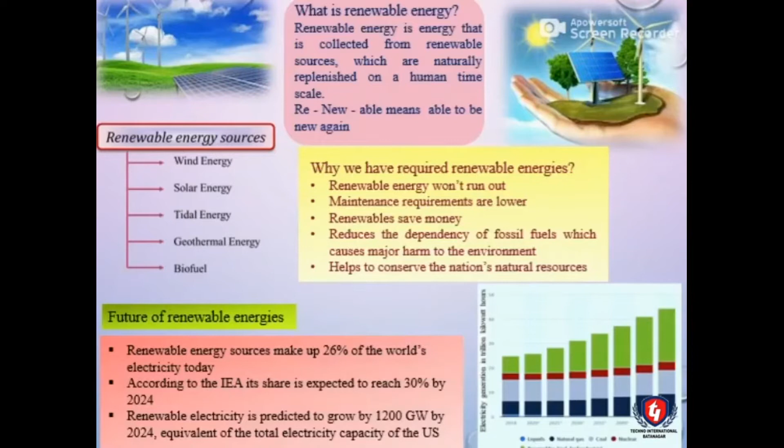Now, due to rapid enhancement of global energy consumption and decrement of traditional energy resources, the research activities on clean and renewable energy sources are continuously increasing. On the other hand, as these new energy forms are regionally limited, it is very much needed to develop advanced and efficient energy storage systems such as supercapacitors, whose efficiency is solely dependent on the structure and properties of the component material. And across the globe, many researchers are working to develop new nanomaterials and nanostructures for efficient storage.

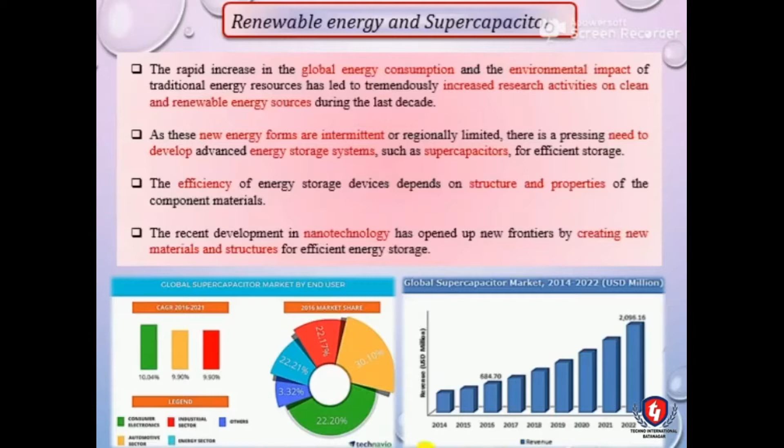Now you can see in the global market scenario how the demand of the supercapacitor is gradually increasing, and it becomes higher and higher. It is clearly visible from these diagrams.

Now, before going to discuss the detail about supercapacitor, just let us know what is a capacitor. It is an electronic component used to store energy in the form of electric potential. It consists of two parallel plates separated by a small distance of the order of a few millimeters, and there is a dielectric material in between the two plates.

And when the plates are connected by a battery, one of them is positively charged and the other is negatively charged. Also, the capacitance of the capacitor is basically defined as the amount of charge stored into it, and this is dependent on the dimension of the capacitor and the material of the dielectric.

Now you have to know what is a supercapacitor. A supercapacitor is a specially designed capacitor which has a huge capacitance value and energy density compared to conventional capacitors.

It can store energy by two ways. One is pure charge storage on the electrode-electrolyte interface via electrochemical double layer capacitance, in short EDLC. The other is by transfer of charge to a layer of redox molecules on the electrode surface.

Here we have shown different types of supercapacitors depending on their working principle. They are basically EDLC, pseudo capacitors, and hybrid capacitors. These are the three types.

For EDLC, we can use activated carbon, graphene, as well as carbon nanotube as electrode material, whereas for pseudo capacitor we can use metal oxide and conducting polymers, and for hybrid capacitor we can use asymmetric hybrids and composite hybrids as electrode materials.

Another thing is that supercapacitor can fill the gap between conventional capacitors and battery or fuel cell, which is clearly visible from this diagram. It is basically a power density and energy density diagram. You can easily visualize it from this diagram.

So the effective distance between the electrodes decreases, which in turn increases the capacitance value, as capacitance is inversely proportional to the distance between two electrodes.

Now, to be a good electrode material, it must have the following properties: high cyclability, long-term stability, high specific area, high electrical conductivity, and so on.

The important criteria to be a good electrolyte material is it must have high ionic conductivity, low viscosity, and good charge compensation properties. These electrolytes can be classified as organic electrolytes, aqueous electrolytes, ionic liquids, solid state polymer electrolytes, etc. Examples of these are also given here.

These are a few advantages of supercapacitors. Why can we use a supercapacitor? As I mentioned earlier, a supercapacitor carries higher energy density than conventional capacitors. Also, it has higher power density than batteries and fuel cells.

It will not generate any kind of toxic gases by chemical reaction, and it is not involved in cathodic and anodic corrosion. That is, it is safe and eco-friendly, and also it has high cycle stability, meaning it has a longer life.

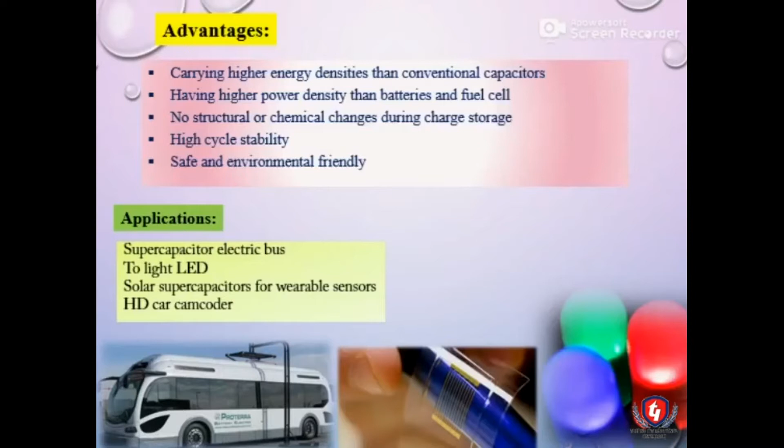In conclusion, I can say the demand for supercapacitors is continuously increasing day to day. Also, many researchers across the globe are working on different materials to improve the performance of supercapacitors. Thank you once again.

The topic I am going to talk about is renewable energy. As we know, energy is a quantitative property of an object, transferable among them via fundamental interaction, which can be in any form like kinetic, nuclear, etc.

According to the law of conservation of energy, energy can neither be created nor destroyed, and depending on the source from where the energy is derived, energy can be classified into two main types: renewable energy and non-renewable energy. Non-renewable energy sources like fossil fuel, coal, oil, and natural gas are used to make energy by burning them.

But once they are finished, we will never get more of them. Since these sources are not good for the environment, the concept of renewable energy is based on the ability to use natural resources that we will never run out of, and we can have all the benefits we want without destroying the earth. They are available in plenty, and it is the cleanest source of energy on this planet.

The types of renewable energy sources are solar energy, wind energy, hydropower energy, geothermal energy, and biomass energy.

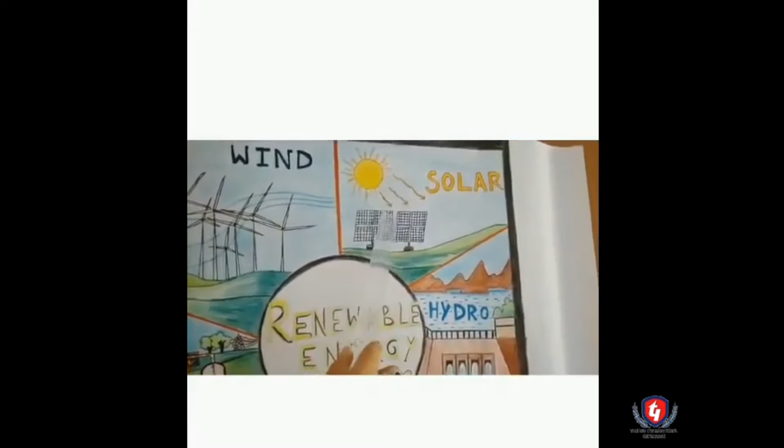Solar power is likely to be the most valuable of the renewable energy sources because it is plentiful and is the least expensive to implement. The process involves placing collectors and panels where the sun will reach, such as the roof. The process of converting what is collected into energy is known as photovoltaics. In order to make this happen, silicon is used to transform it.

The earth receives 1.7 times 10 to the power 17 watts. Solar energy can be used to cook food by trapping and concentrating the sun's heat in a cooker, and to heat water or to generate steam.

Next is wind power. The wind moves at high speed, and places selected for the use of windmills should have wind constantly blowing at the rate of 15 miles per hour. Also, the waves that occur in oceans can be used to generate hydropower.

There are large windmills hundreds of feet high strategically gathered in these open areas. Each of the blades on the windmills requires a semi-truck to haul it. But generating power with these windmills is extremely expensive and time consuming, and the amount of energy produced is never the same, as it depends on how windy or how gentle the breeze is on that particular day.

Next is hydropower. There is power found in water as well, and the process is referred to as hydropower. It can create much more energy at one time with very little water than solar power or wind power. Hydropower is used to offer electricity to more than 28 million people around the world. The process involves plenty of safety precautions, as the water can never come into contact with the electrical part of the process. The process occurs as the water flows, and it spins turbines found in a generator.

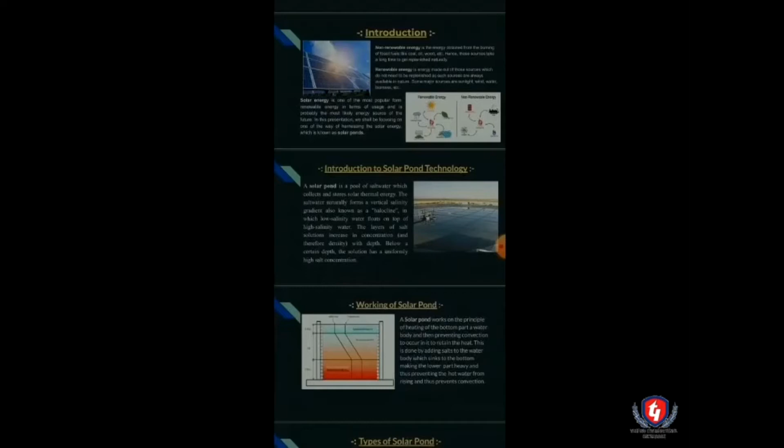Now I would like to move on to the working of a solar pond. A solar pond works on the principle of heating the bottom part of a water body and then preventing convection to retain the heat. This is done by adding salts to the water body which sink to the bottom, making the lower part heavy and thus preventing the hot water from rising, which prevents convection.

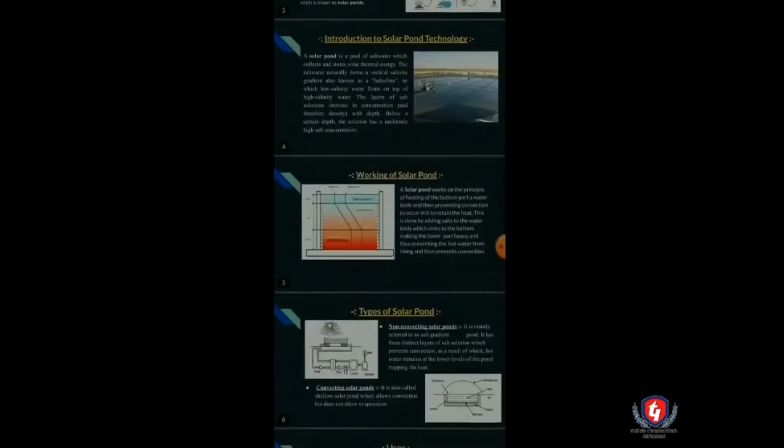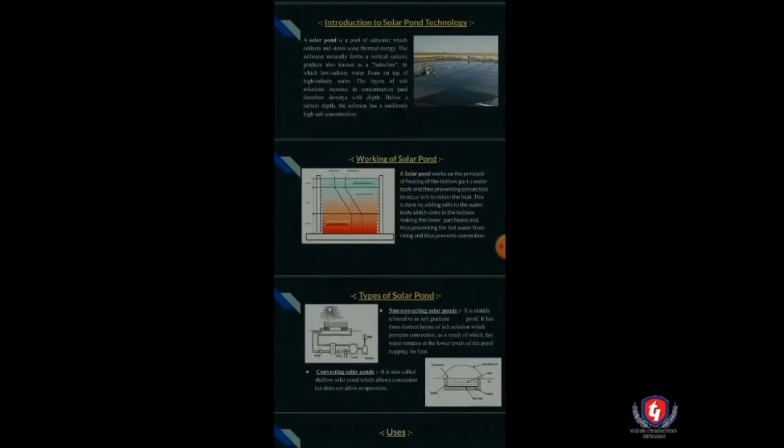Now I would like to state the different types of solar ponds. The first is non-convecting solar ponds, mainly referred to as a salt gradient pond. It has 3 distinct layers of salt solution which prevent convection. The other one is convecting solar ponds, also called shallow solar ponds, which allow convection but do not allow evaporation.

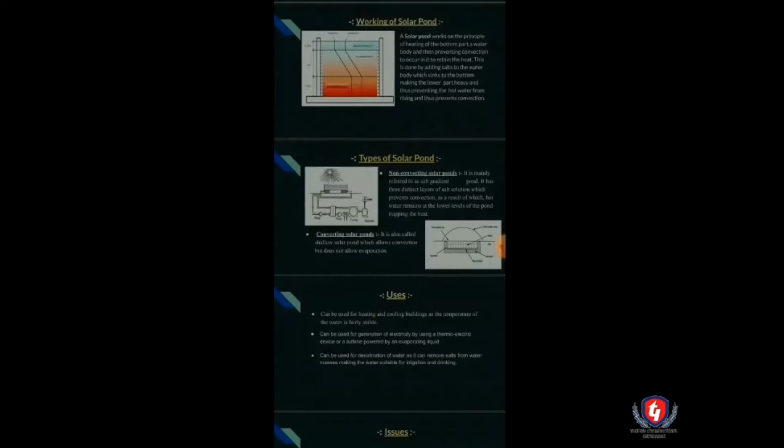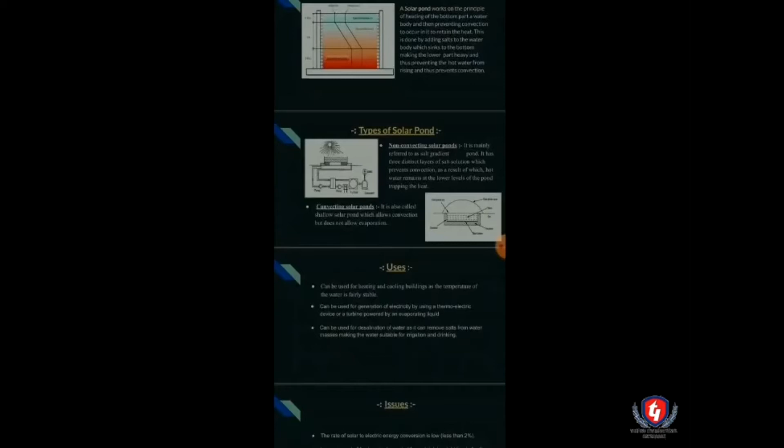Now the main point of our presentation is the usage of this solar pond technology. The first use is that it can be used for heating and cooling buildings, as the temperature of the water is fairly stable. Second, it can be used for generation of electricity using a thermoelectric device or a turbine powered by an evaporating liquid. The last one is it can be used for desalination of water, as it can remove salts from water masses, making the water suitable for irrigation and drinking.

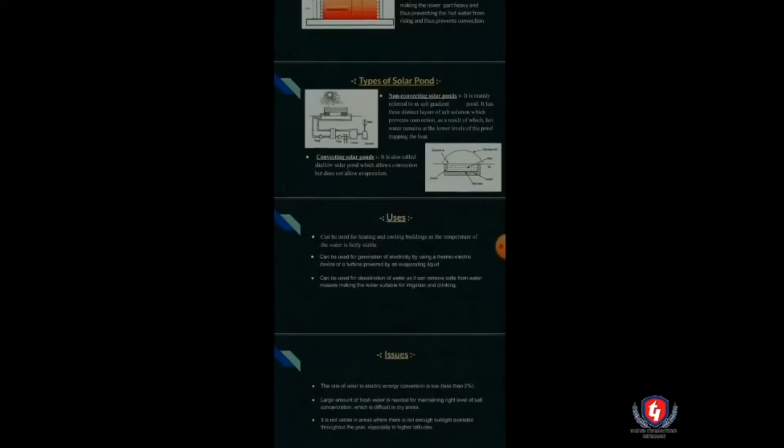But with pros there are always cons. The cons of our study are that the rate of solar to electrical energy conversion is low, less than 2%. There's a large amount of fresh water needed for maintaining the right level of salt concentration, which is difficult in drier areas. Another problem is that it is not viable in areas where there is not enough sunlight available throughout the year, especially in higher latitudes.

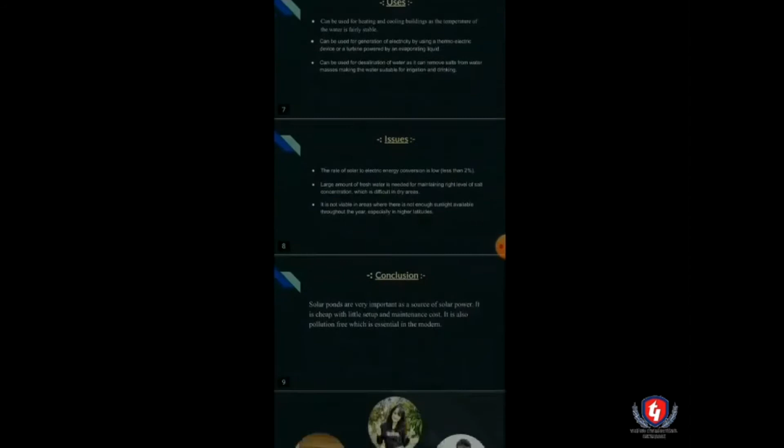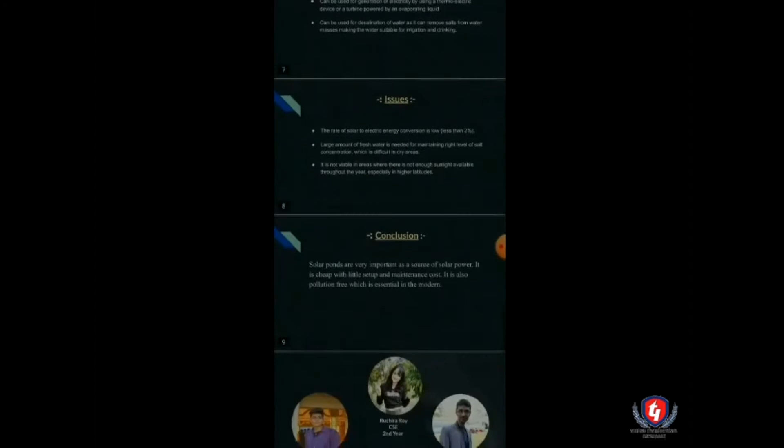With this, I come to the conclusion that solar ponds are very important as a source of solar power. They are cheap with little setup and maintenance cost. They are also pollution free, which is essential in the modern world.

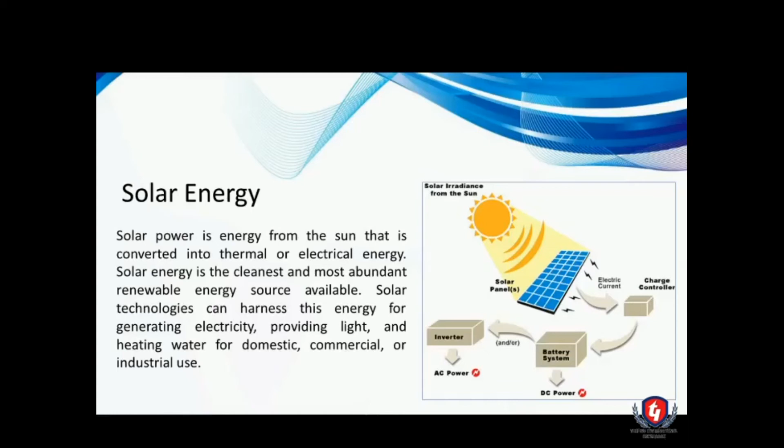Solar energy. Solar power is energy from the sun that is converted into thermal or electrical energy. Solar energy is the cleanest and most abundant renewable energy source available. From the diagram, you can see the solar panel collecting solar energy from sun rays and converting them into electricity. This electricity can be used to power our houses.

Wind energy. Wind, caused by uneven heating of the atmosphere by the sun, variation in the earth's surface, and rotation of the earth, all move the wind turbine blades. These turbine blades, connected to a rotor, can easily generate electricity and power our houses, offices, and many other electrical resources. Thank you. The rest will be continued by Rahul Bag.

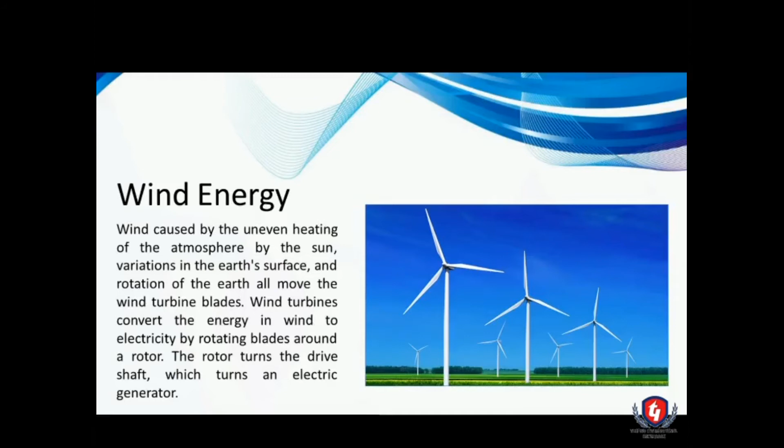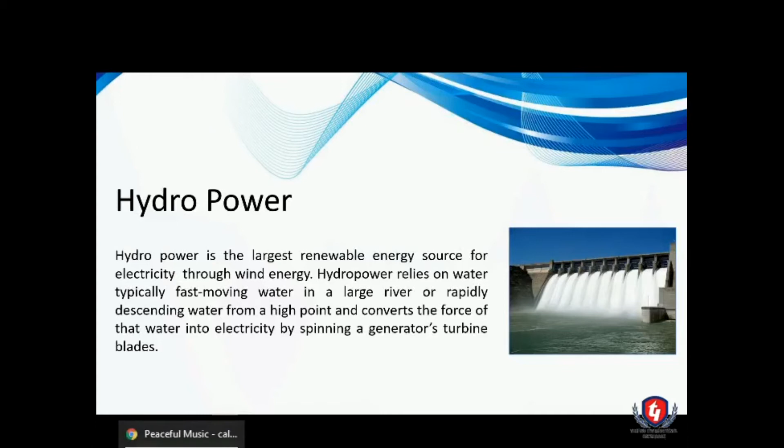Hello everyone, my name is Rahul Bag from EC third year, and I will be continuing with hydropower. Hydropower is the largest renewable energy source for electricity. Here, turbine blades are moved by fast moving water, which in due time generates electricity for our homes and many small scale industries.

Biomass. Biomass is organic material that comes from plants and animals, and includes crops, waste food and trees. Generation of biomass can help the waste situation on earth and counteract it in a developmental way. When biomass is burnt, the chemical energy is released as a form of heat energy and generates electricity with a steam turbine.

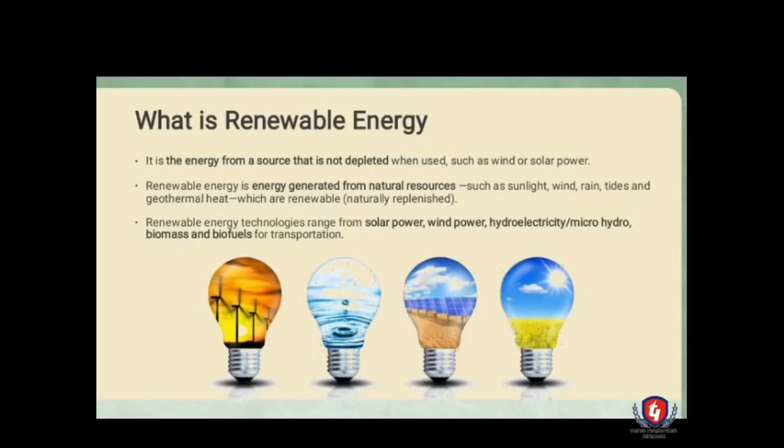So if we move on to the next slide, we can find why we should use renewable energy. Electricity generation is one of the leading causes of industrial air pollution. We know that most of our electricity comes from coal, nuclear or other non-renewable power plants. Producing energy from these resources takes a lot of toll on our environment, polluting air, land and water.

So actually we shouldn't do that. At the end of the day, the non-renewable energies are really polluting our earth. And we should always use energy from sun, wind, thermal energy, because they are never ending. So that's the thing we should do always.

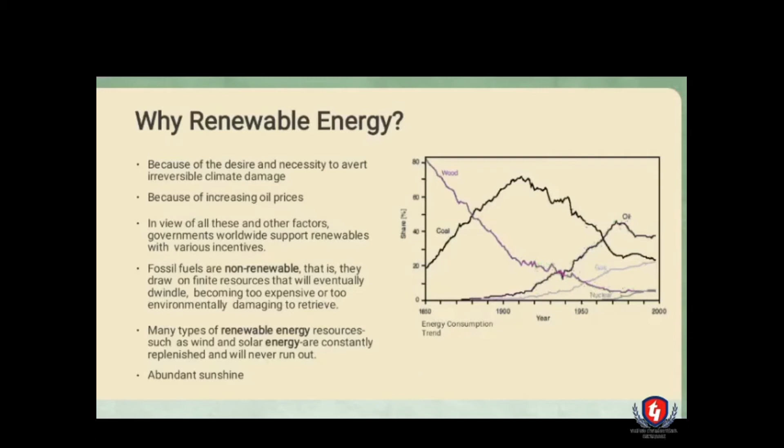Now moving on to the next slide, we are finding the different types of renewable energies: solar energy, wind energy, hydropower energy, heat energy and biomass energy.

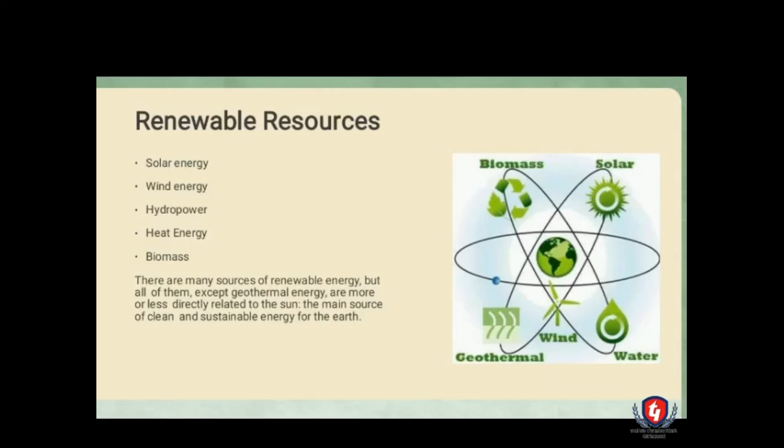Next, talking about some problems in using solar energy: initial cost, produces power only during the day, solar cell effectiveness, it requires large area setup. And some advantages: it is clean energy, renewable power, and it provides power in remote areas.

And talking about other types of energy, that is wind energy. Wind energy is mainly found on barren land where turbines are kept. The wind moves the turbine and from there we get electricity. So we should always use this type of renewable energy, and we should promote more of using renewable energies than non-renewable resources. So thank you.

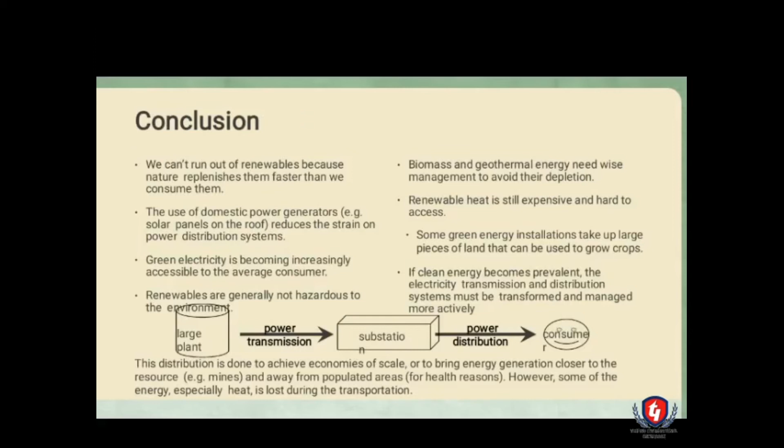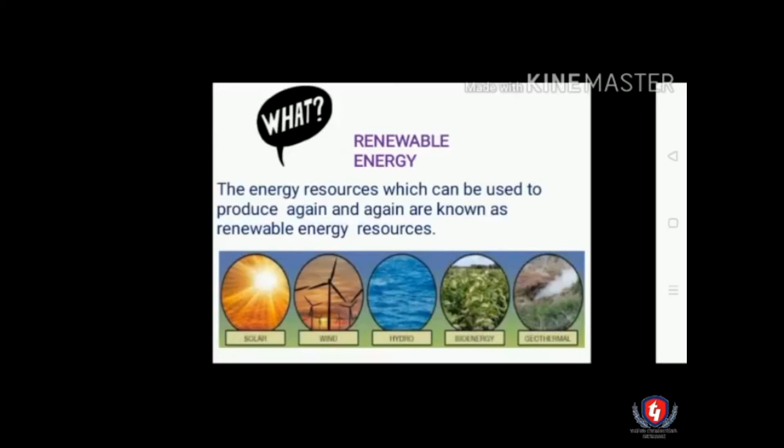Source of energy. So let's start. What is renewable source of energy? The energy which can be regenerated are called renewable source of energy. The definition of renewable source of energy is the energy resource which can be used to produce again and again, also known as renewable source of energy.

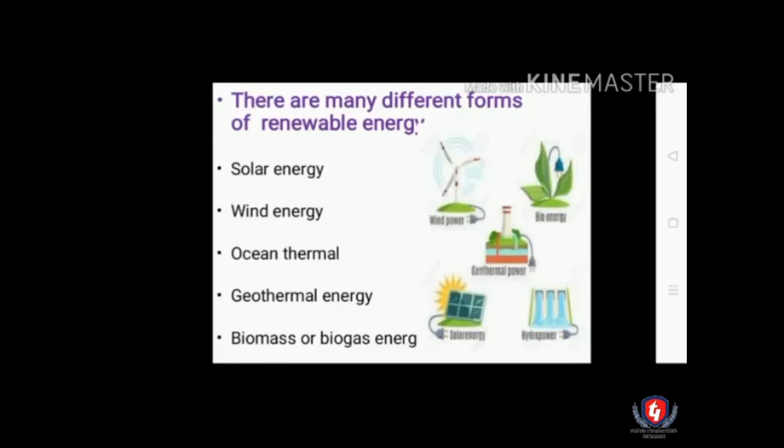Forms of renewable source of energy: there are mainly solar energy, wind energy, ocean thermal energy, geothermal energy, and biomass or biogas energy. Solar energy: what is solar energy? Solar energy mainly comes from the sun in the form of visible light and other electromagnetic radiation.

Solar energy is mainly converted into electrical energy. Examples of such devices which convert solar energy to electrical energy are solar cooker, solar heater, and solar cell. What are the advantages and disadvantages of solar energy?

Solar cells do not produce any carbon dioxide and don't affect our environment. The main disadvantage of solar energy is that it is not a constant source of energy. It depends upon the weather, the place, and the time.

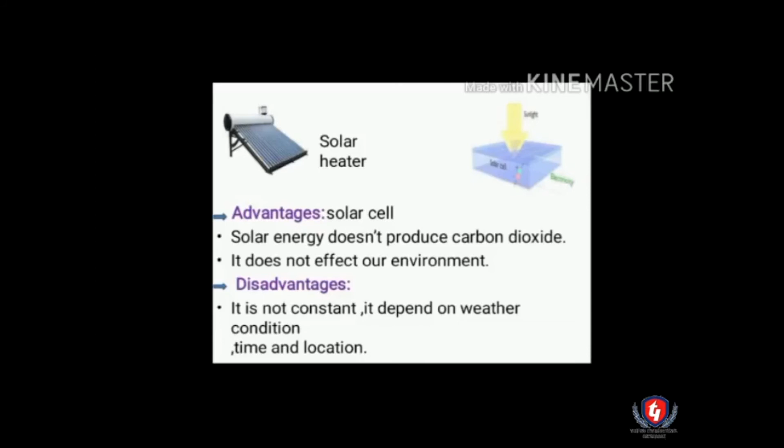Wind power is a renewable source of energy which is clean and free, and which helps reduce dependence on fossil fuels. Wind energy reduces the emission of greenhouse gases and other pollution. The major problem with wind energy is noise, which can be improved.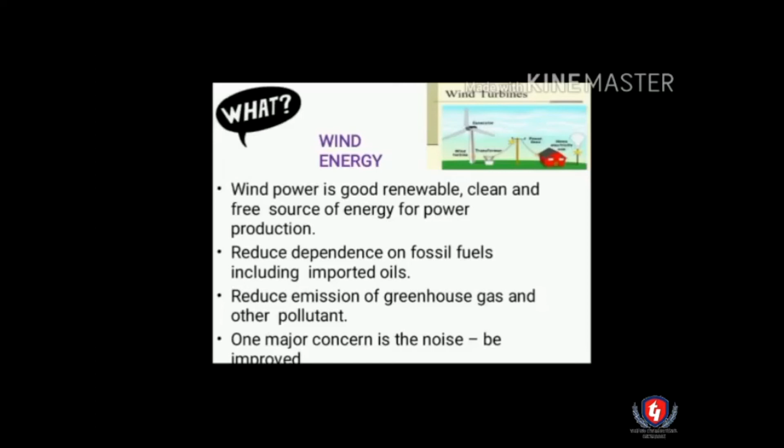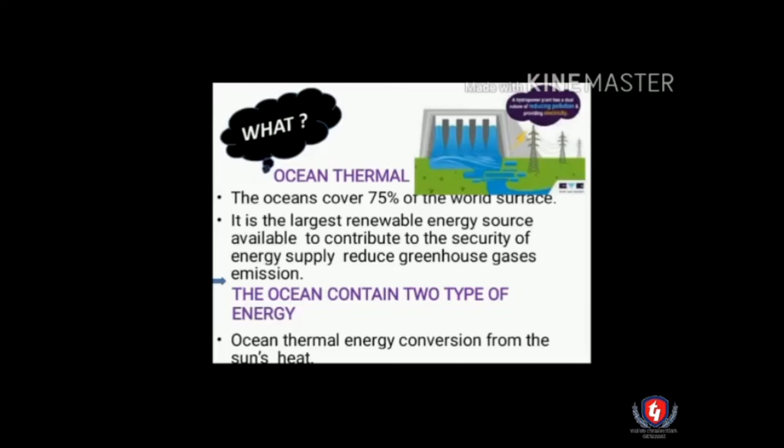Geothermal energy can be gained from the heat of the earth, and it is clean and sustainable. The range of geothermal energy starts from the shallow ground to hot water or hot rocks. It's found miles deep in the earth, stored in the form of molten rocks and magma.

Geothermal energy can be pumped out with a heat pump, which is used to cool or heat buildings. Hot water comes from the ground to heat the building, and cold water can be pumped down, and this process can be reversed.

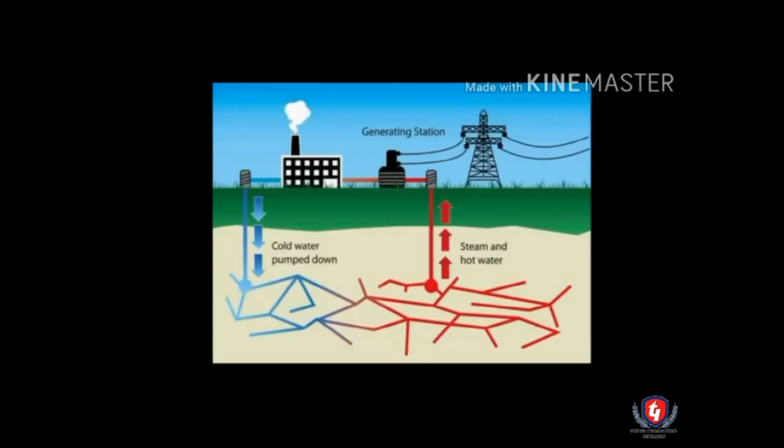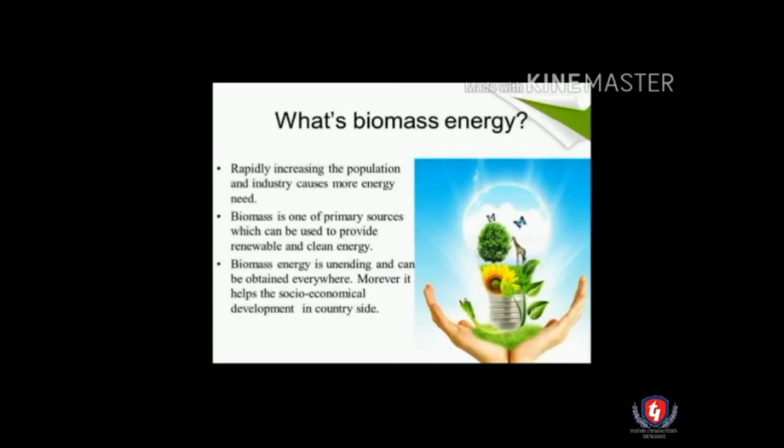Rapid increase of population and industry causes need for more energy, so biomass energy is a primary source of energy. It is very clean energy. The main point about biomass energy is that it can be obtained anywhere throughout the country.

Biomass energy is a renewable source of energy. It can be generated from the waste of wood scrap and forest resources.

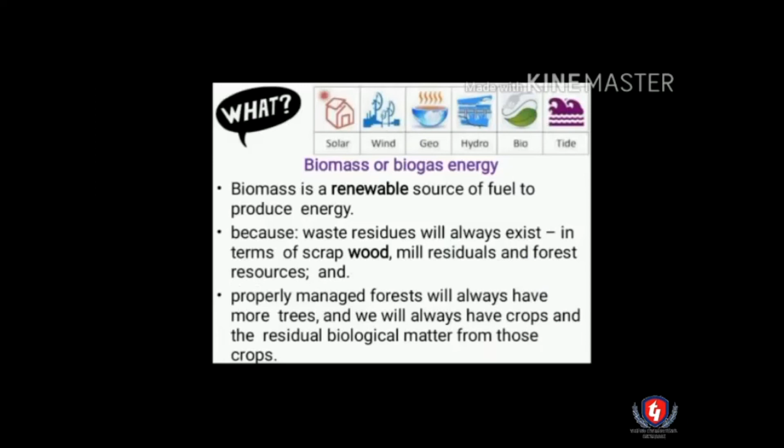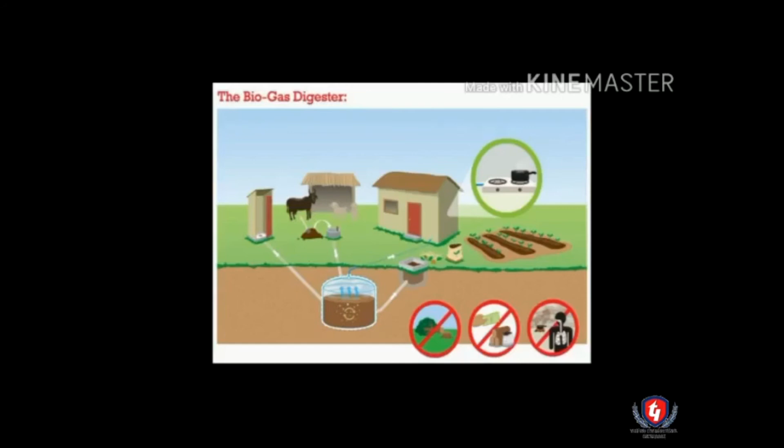Why do we need renewable sources of energy? Because fossil fuels can't last forever, and renewable sources of energy can provide new jobs, making our country less dependent upon fuels. Renewable sources of energy are eco-friendly. As we know, renewable energy decreases air pollution and gas emissions.